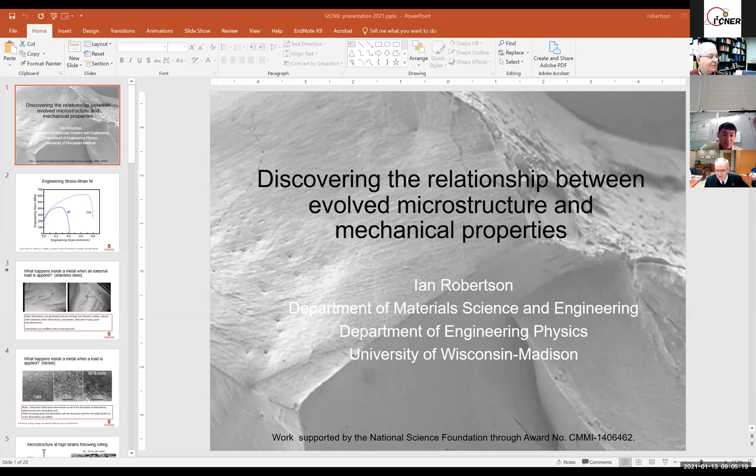Professor Robertson, could you start the presentation? Yes, let me just see if I can share my screen with everyone. Okay. So hopefully everyone is able to see the screen. Petros, you can see the screen? Yes, clearly.

Good. Thank you. So let me begin by wishing all of you a good morning and also asking after you and your families. These are very interesting times that we find ourselves working in, and certainly very different ways than we normally collaborate. I never thought we'd be using Zoom or any of these tools quite as much as a way for us to talk to each other. I still prefer meeting in person and being able to listen to your ideas and hearing from you.

So what Petros asked me to do tonight is to talk to you about how hydrogen impacts the evolution of the microstructure and what we can learn from it.

I was a little bit embarrassed when Professor Kubota was reading out my introduction, because it also said something in 1984, which certainly dates how old I actually am. So that was a little bit embarrassing, but hopefully you'll get something from this.

I will say that for those of you that are still working in the area of hydrogen embrittlement, this is just a fascinating time to be working in any of these new areas. You have so many new tools and capabilities, whether it's experimental tools or computational tools, that you can actually bring to bear on the problem. And I hope that the talk this evening will make you ask some questions about what tools you should be using to probe how hydrogen is causing materials to fail prematurely.

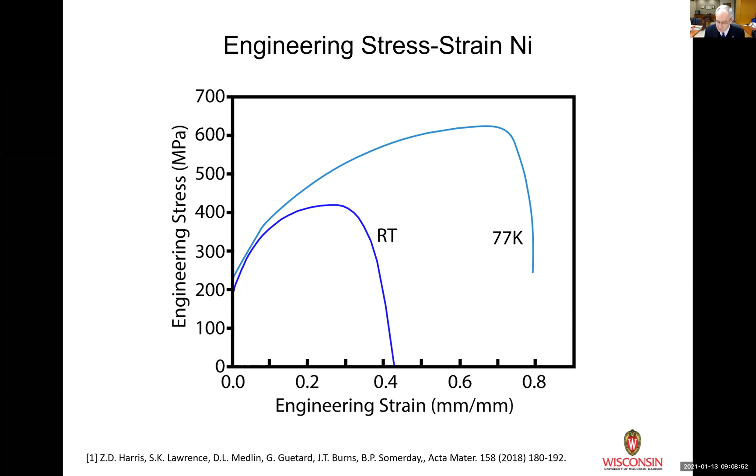But what I want to do is actually take you inside the material and ask, what gives rise to this macroscopic property? What's actually going on inside the material to give you that response? So hopefully I'm going to show you a couple of videos here and these are going to work. For those of you that aren't used to looking at electron micrographs, let me explain first what you're looking at.

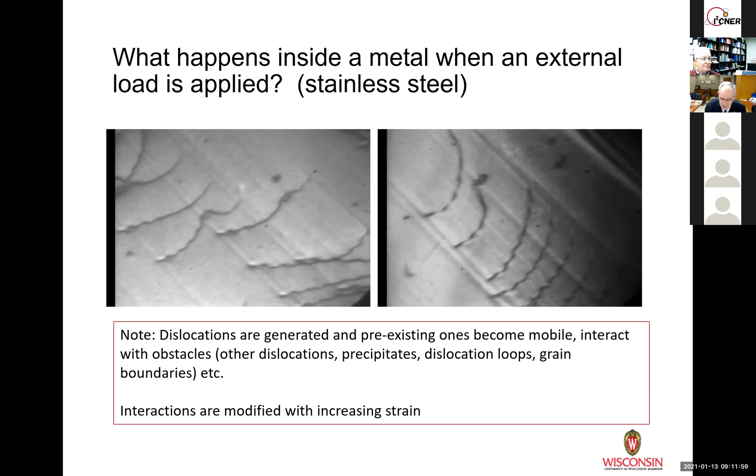So my first message I want to leave you with is, just because we might understand what happens when a material initially deforms, that interaction does not stay the same. Things change inside the material as the dislocations move and they interact with other precipitates. They're going to change when they interact with grain boundaries and with each other. So just because we understand dislocation mobility at the very early stages doesn't mean we understand them as a function of strain. So what happens as we keep applying more load? What happens to the dislocation structures that you see?

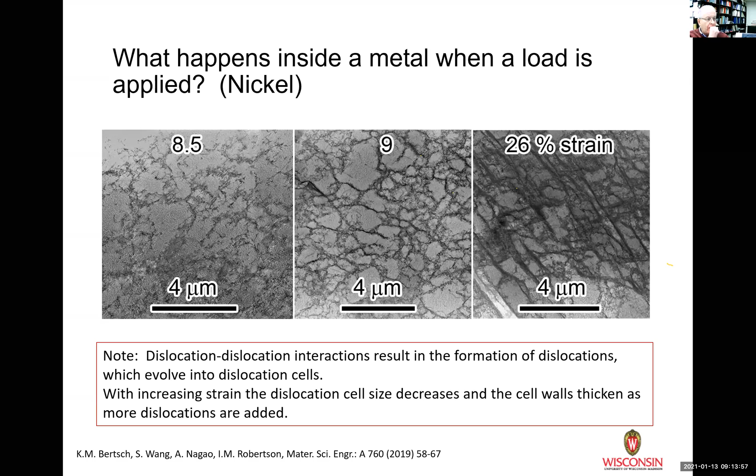Now, if you think of moving a dislocation in this structure, it would be very, very different than the one I showed you at the beginning in the little movie, right? The microstructure is more complicated. There are more barriers to the dislocation motion. And the more barriers there are, the more stress, more load you're going to have to apply in order to get the dislocations to move. So this is what happens just in a metal, no hydrogen, just loading up the material.

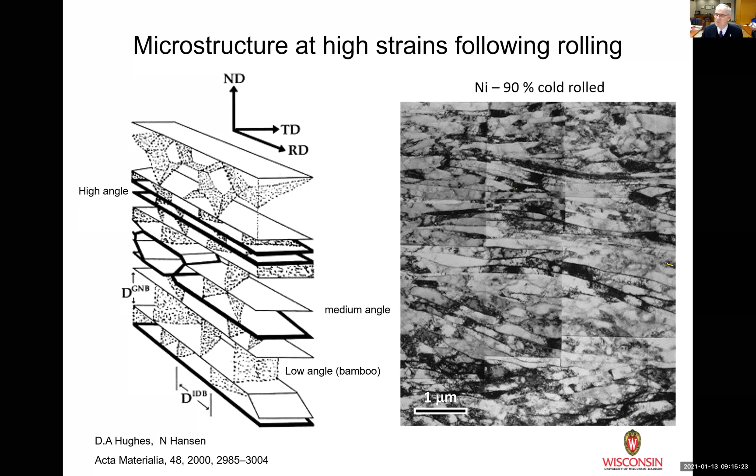So this is the kind of work I used to do. And at the time, I would say, at least I hope we'd have said that it was advanced for its time and we were actually forging new grounds in some of the things we did. But today, you can actually go much, much further.

And you can then say, okay, can I actually extract quantitative information from those microstructures that I showed you? And the answer is, yes, I can. I can actually derive more information that I can then relate back to the macroscopic stress strain properties than I used to be able to do in 1984. So what kind of information can you get? Well, here's just an example.

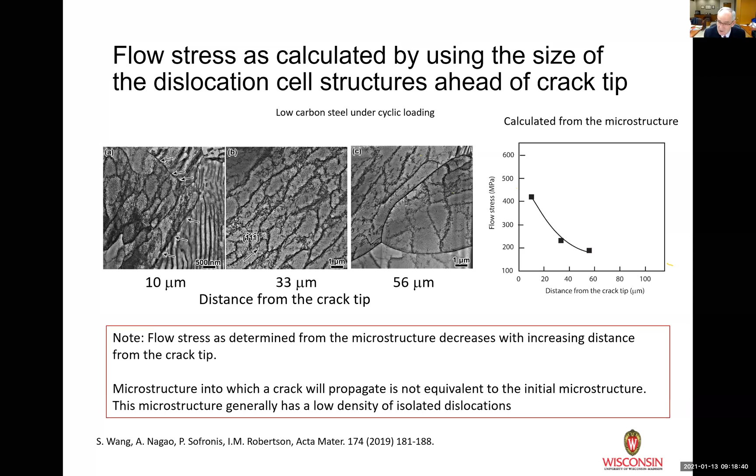And you can do this in multiple different samples. So we can actually get ideas about the magnitude of the stress as it approaches the crack tip from knowledge of the microstructure. And I'd say that's a new thing that we can do today that we couldn't do before. So that's one thing I want you also to bear in mind. We can do other things now too.

As I said, as we increase the level of deformation and we make the dislocation structures tighter and tighter, those cell structures get smaller and smaller, the next thing that must happen is you'll get local rotations. Just think of trying to deform something. It's going to try and deform. It can also rotate to take into account that deformation. Each of the cells will rotate slightly differently. It makes perfect sense when you think that's what's going to happen inside a material. But can you measure it?

And today you actually have systems that you can put inside your electron microscope that allow you to make EBSD maps using the probe of the electron beam. So now you're talking about a beam size that's much smaller than you'll get in an SEM, even in your best SEM. It's much smaller. And you can actually start pinpointing where the stress is coming from. You can actually measure it.

So the two color-coded squares that you see here are just two areas of a grain. And we've gone in and we've measured the misorientation. And you can see the difference. Now, the way we've plotted it in this case is with respect to the reference point. And the reference point is actually this black circle with the white border that you see up at the top. Everything is done with respect to that white dot. So what you will actually see is this area down here. If you were to come from the top to almost the bottom, you're seeing a local rotation of 10 degrees.

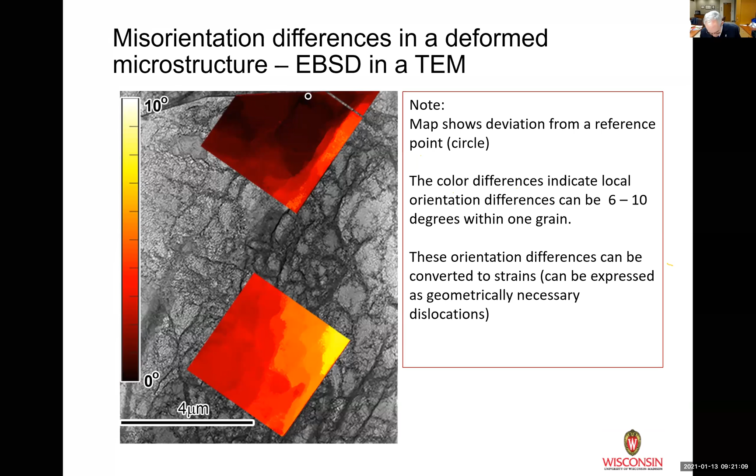Now, one thing to remember, you don't always get a change in fracture mode where it will go from ductile transgranular to an intergranular failure when you put hydrogen in. It depends on how much hydrogen you actually put in your system. So just to show that, here's some old work of Dave Lassila's out of the University of Illinois, where he couldn't measure how much hydrogen was actually on the grain boundary, but he could put different amounts of hydrogen into the specimen. And he made the assumption that if he leaves the sample at room temperature long enough, you'll get diffusion of that hydrogen and you'll get more on the grain boundary. And what he's showing here is that the percentage of intergranular failure will increase as you add more hydrogen into the bulk of the material.

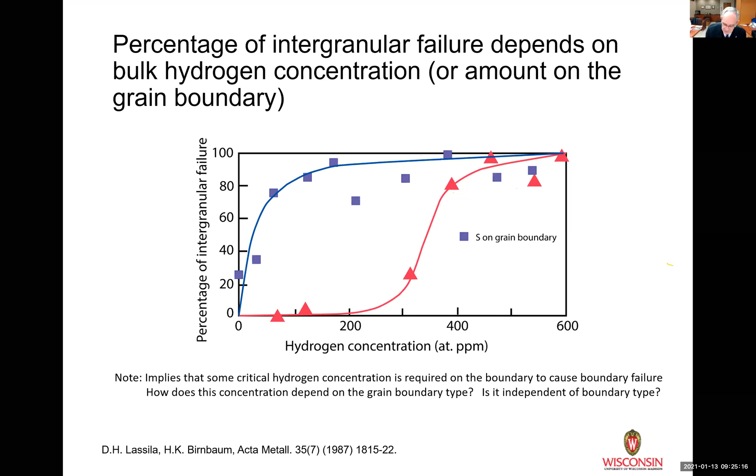So I said at the beginning, one of the things I think that you're incredibly fortunate in being this time is that you have all sorts of different tools at hand that you can apply to the problem. So this is another work from Shuai, and he has been using this grand canonical thermodynamic model to actually look at what's the reduction in the cohesive strength of a grain boundary due to the presence of hydrogen.

And you can see his results here on the left. You pump hydrogen onto the grain boundary, you do decrease the cohesive strength. If you put enough on there, you'll decrease it a lot, and yes, it will fail. The question that comes back to you to ask, though, at the very extreme of this graph where it says, yes, the boundaries are incredibly weak, is it practical under the charging conditions that you use in your lab to ever put that much hydrogen into a material and into the grain boundary?

Right? We all know the experimental conditions under which we charge microscopic specimens. So if you're looking at this and say, well, yeah, it's going to fail, go back and ask the question, is it physically possible for me to put that much hydrogen into the system and onto the grain boundary in order to get that magnitude of decrease?

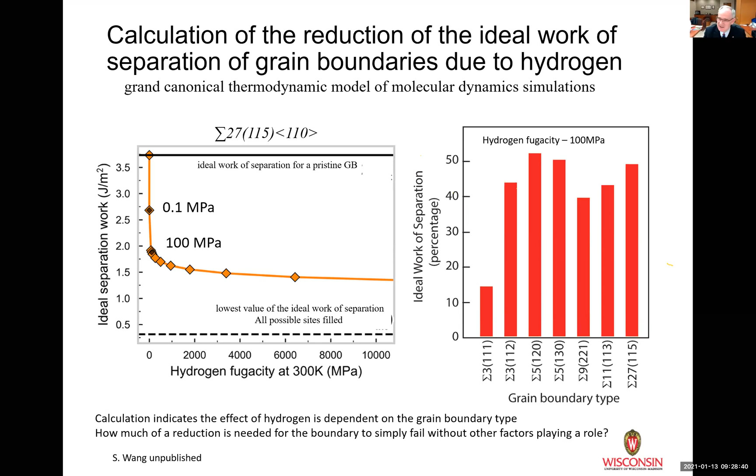So I'd actually like to go do that experiment, but my other job actually stops me doing that. But hopefully one of you will. And when you complete it, send me your paper because I'd be fascinated to read it. And it's okay if you come back and say, what you proposed and what you told us is completely wrong. Here's the right answer. I'm okay with that as an answer too. And I'd love to talk to you about doing that experiment.

So I just mentioned that the grain boundary could fail, and that's been one of the classic mechanisms that's been put out there. It's the hydrogen-induced decohesion mechanism. What it says is that hydrogen goes on the grain boundary, reduces the boundary cohesive strength enough that it just fails. Any plasticity that happens in the material is totally irrelevant to the failure. There's nothing to do with it. Is that right? We also know that dislocations transport hydrogen. There's some very elegant experiments that have been done that show that.

So if hydrogen is transported by the movement of dislocations, and we need to put enough hydrogen on the grain boundary to get decohesion-induced failure, is it right for us to say that plasticity has no role in hydrogen-induced decohesion of a boundary? I'd say, no, you need to pump more and more hydrogen on the boundary, so that transport is important. The challenge with that mechanism, though, if you look at dislocations hitting a grain boundary, they'll go into the boundary, but the grain boundary will also emit dislocations.

If that happens, the dislocations go in, bring in hydrogen. The dislocations going out, they take away hydrogen. So remember, one of the things I asked you to think about is that if we're going to make the assumption that it's just straight hydrogen concentration in the boundary that causes decohesion, is it right for us to make the assumption that the hydrogen concentration is static while you've got plastic processes? And I would say, at least in the early stages of straining, that can't be true because dislocations do move hydrogen. So now we've gone from a static hydrogen concentration on the boundary to a dynamic one.

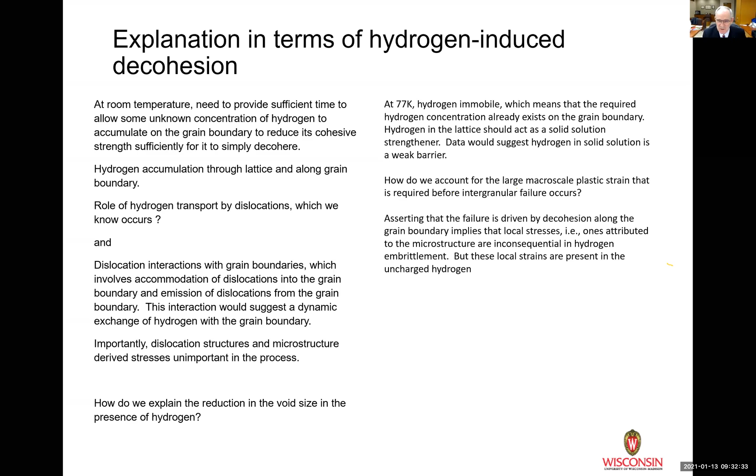It also says that if we're not moving hydrogen by dislocations, and that the diffusion through the lattice or along the grain boundary is low because of the temperature, it says that the starting hydrogen concentration is the one that's important for inducing the decohesion. Right? That to me, that's what that result tells me. I'm going to see if I can go back in slides, which is something I normally don't do in a talk. But let me go back and show you this.

And here's the question I want you to think about. At 77 Kelvin, we said that all of the hydrogen should be on the boundary because there's very little diffusion that's going to happen either through the lattice or along the grain boundary, and there's going to be very little transport by dislocations. So the hydrogen concentration that's on the boundary at the beginning is the one that caused the decohesion. If that's correct,

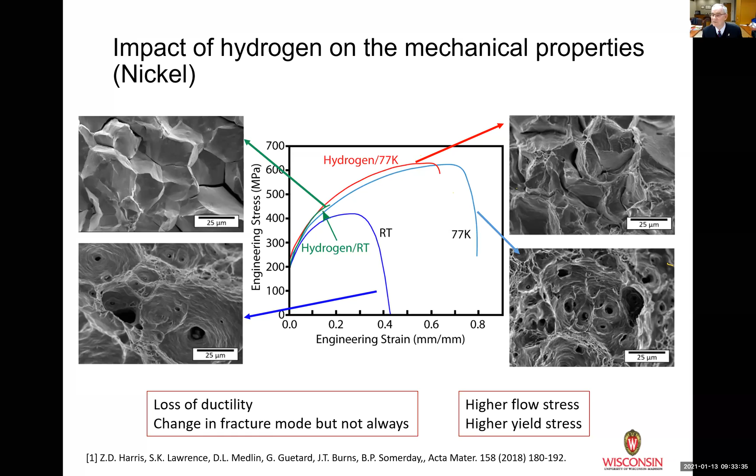if you look at this stress strain curve, why did we need to load it up to over 60%? I find it fascinating that we would say that all of that deformation that's happening, all of that accumulation has had no impact on the mechanical properties. But that's what the classic decohesion explanation would tell you. So I would ask you to think, is that right? So now what I want to do is to take you more to what I think is happening, and again, to pose some questions to you.

Professor Kubota was very kind when he talked about my 1984 work and the fact that it led to some recognition from the Department of Energy. So this is, in fact, one of those early movies that we made about adding hydrogen into an electron microscope, applying some load, and seeing what would happen to the dislocations. In this particular example, we applied some load. We knew these dislocations were mobile. We took the load off the specimen and then simply added hydrogen gas into the electron microscope. And we allowed that hydrogen to interact with the metal.

Now, one of the things that does happen is that the electron beam comes down, interacts with the hydrogen molecule. So you'll get atomic hydrogen. So we have high fugacities present at the sample surface. So I think we're pretty confident that we were injecting hydrogen into this sample. So what happens when we inject? You'll see the image degrade slightly, and then you'll see those long black lines just start moving. There is no increase in the applied load. It's all due to the presence of the gas in the sample.

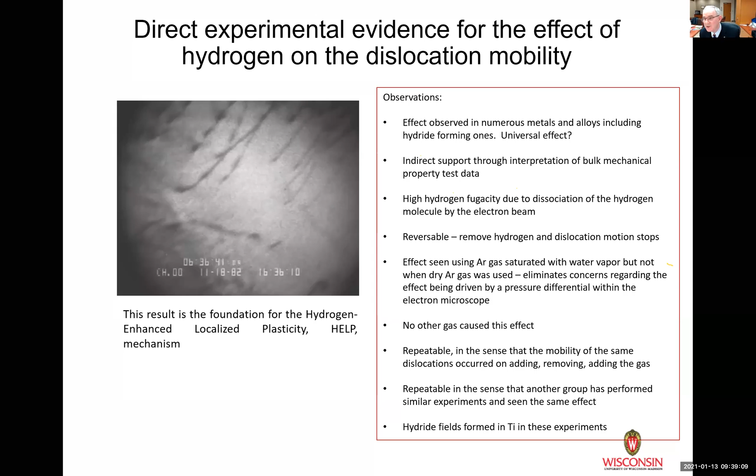So one of the things that comes up, we've said that hydrogen's going to accelerate the mobility of dislocations. At least that's how we interpreted the microscope experiments we did. If that's true, one of the things that we would predict is that for the same level of plastic strain and material, we should see a different dislocation microstructure in the absence and the presence of hydrogen. So again, this is work done by I²CNER, looking at nickel following high pressure torsional processing.

The upper images show the uncharged material, and the lower one shows the hydrogen charged material at two different plastic strains. Now, the beauty of the torsional processing was that the materials were getting the same plastic strain. And by picking the same locations on the samples, we could say that those samples had experienced the same plastic strain. If you look at the upper image on the left, you'll see a dislocation structure, but you'll also notice that there's areas where the dislocation structure is poorly formed, and some of the cells are actually really quite large.

If you compare that to the bottom image, one of the things that you'll find is that the cell size is now much smaller. And remember, cell sizes say that the processes have gone further. In the old days, we'd have said that means the material's been subjected to higher plastic strain. They can't be in this case because the experiment was done to yield the same level of a measurable plastic strain. Right? So we've just negated one of the arguments that says the difference is because you've taken them at different plastic strains. They aren't. The experiment was designed to give you the same plastic strain, so the microstructures are different.

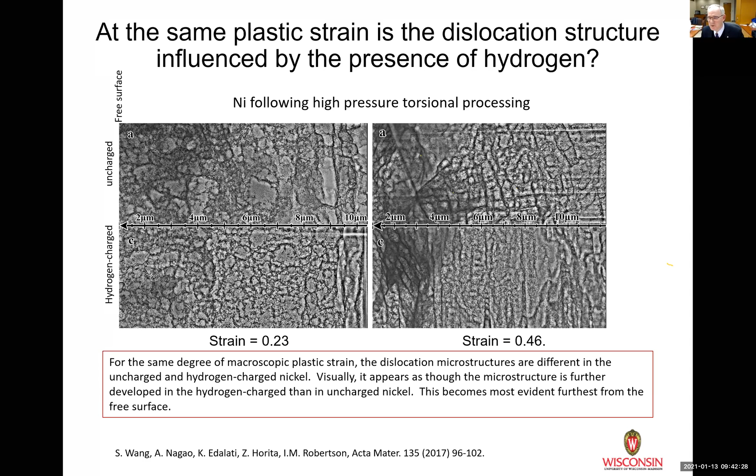And I don't believe we do, because we've always based it on our past understanding. Petros probably isn't going to like me for saying that, but I think he still has work to do. And for those of you that are working in this area, I look forward to you again showing me that this idea is either right or wrong.

So as we go up and we say, well, can we see it in more than one material? This again is an example from nickel. We're looking at the same level of strain. And I must admit, now looking at this figure, I forgot to put the grain orientation on the sample. You know, one of the challenges in electron microscopy that we face is people can always say, well, the microstructure that you see depends on the grain orientation. And they're absolutely right. You must compare microstructures in the same grain orientation.

So one of the beauties that you have today is that you can do EBSD analysis in a sample. You can identify the grains and the grain orientations prior to deformation, because those orientations will change when you deform, but you can measure it prior, identify those same grains later and say, well, I know this grain started as near 011. So you can pick that starting orientation and you can compare them. And that's what we've done in these three images here.

So you'll see a comparison at 8% strain, comparison at 9.5. In this case, the hydrogen charged one failed at 15%, and the other one didn't fail. It was still up at 26% strain. And if you look at the microstructures, 8% strain, no hydrogen, a sort of ill-defined cell structure. If I look at 8% with hydrogen, still the early stages of cell formation, but more formed than the uncharged. Right? Again, it goes to this accelerating effect.

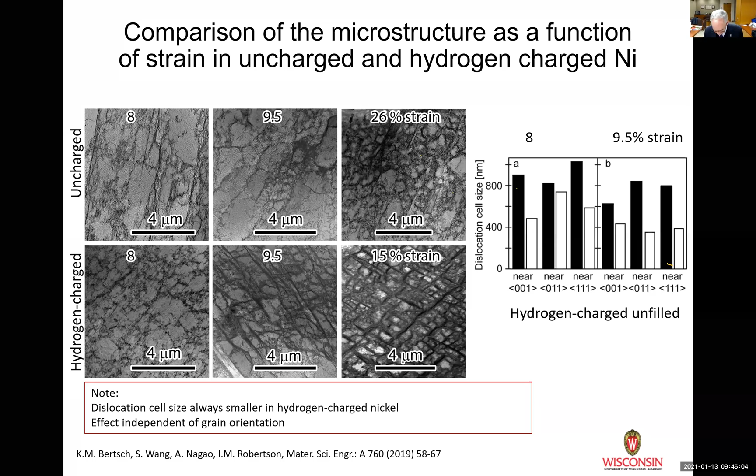So one of the things I told you can do is you can start to think about imaging the local strain. You can get information from the microstructure. I've shown you how to do that, and I'll take you back to that in a moment. But you can also visualize it. So I said earlier that you could do EBSD on an electron microscope specimen using the beam size of an electron microscope. So the one example you see here is, again, nickel. It's hydrogen charged, it's uncharged. The hydrogen charged is 15% strain. The uncharged is 26% strain.